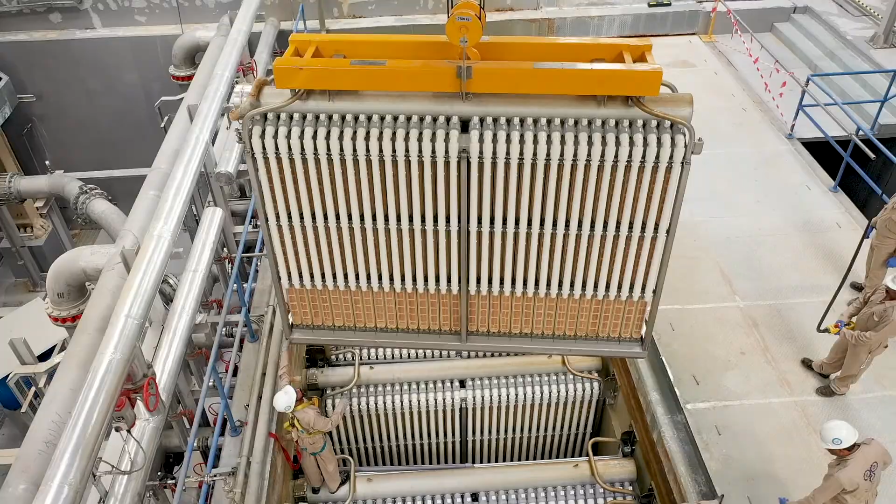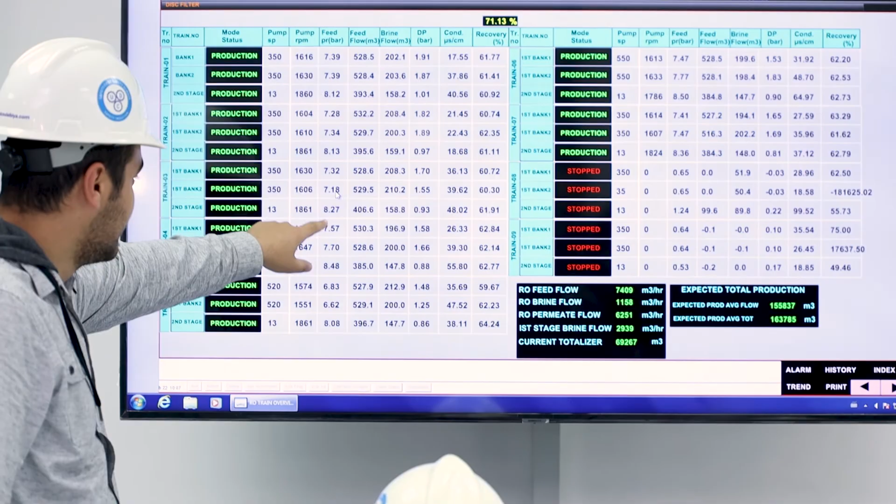A major concern for the Kuwaiti government is to protect health and environment. Hence, it is willing to endorse all strategic projects that are developed based on the latest state-of-the-art technologies, deliver top global results, and hand it over to the most reliable expertise to execute and operate. Therefore, at Utilities Development Company, with our wastewater treatment and reclamation plant at Sulaybiya, we are setting the standard for water reclamation and reuse regionally and globally.

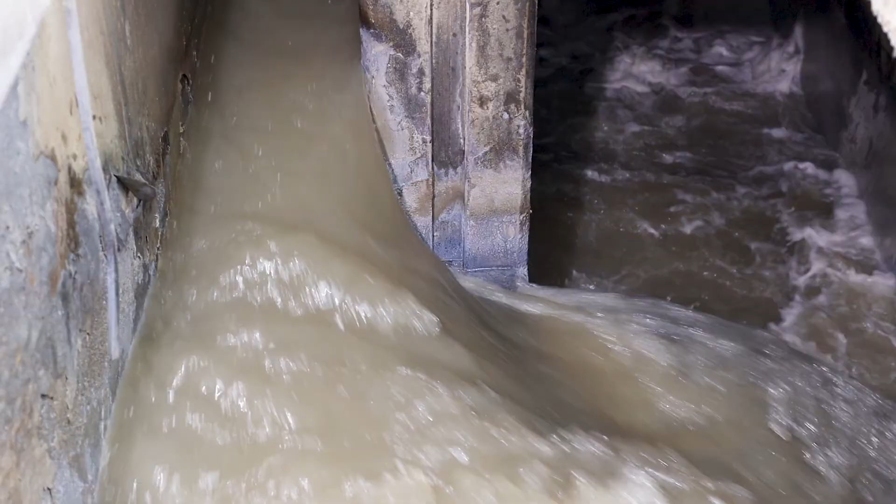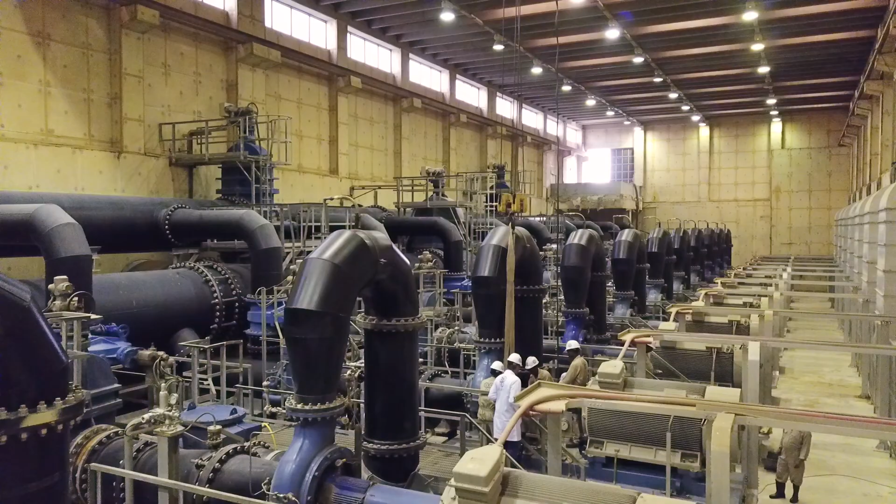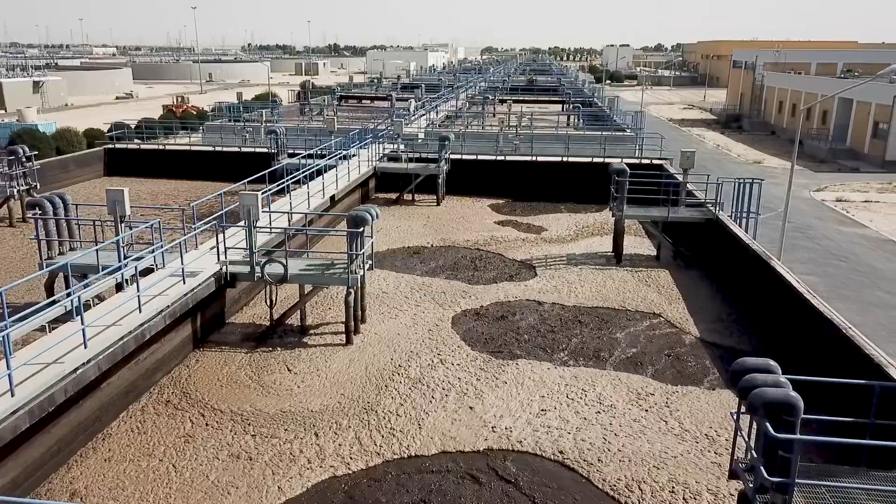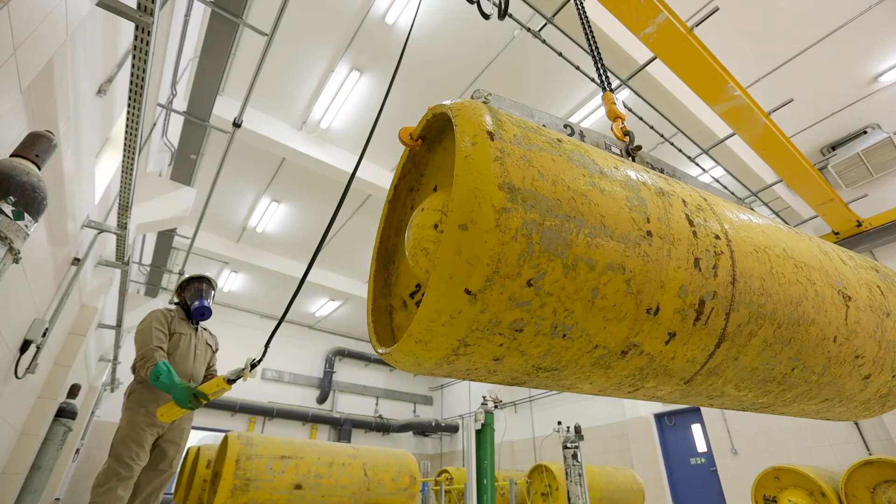The concept of the project is to treat domestic wastewater generated in the state of Kuwait to potable drinking water quality for ultimate reuse. Utilities Development Company, UDC, was awarded the concession contract for a period of 30 years to build, operate, and transfer (BOT) the Sulaybiya Wastewater Treatment and Reclamation Plant. In December 2004, the plant successfully commenced its operation and maintenance phase. UDC, the concessionaire, continuously oversees the plant's daily running complexities and coordinates the various operational aspects of the plant.

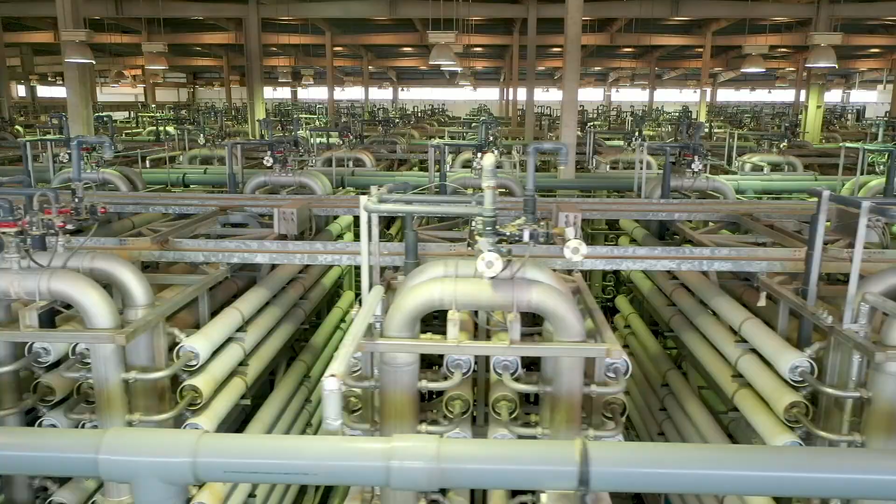Since December 2004, the plant has been treating and reclaiming 375,000 cubic meters of raw sewage per day to potable standards exceeding the World Health Organization's requirements. The product water is discharged to the Ministry of Public Works for end use. In April 2019, the plant was expanded to treat an inflow of 600,000 cubic meters per day, which represents about 60% of Kuwait's domestic sewage.

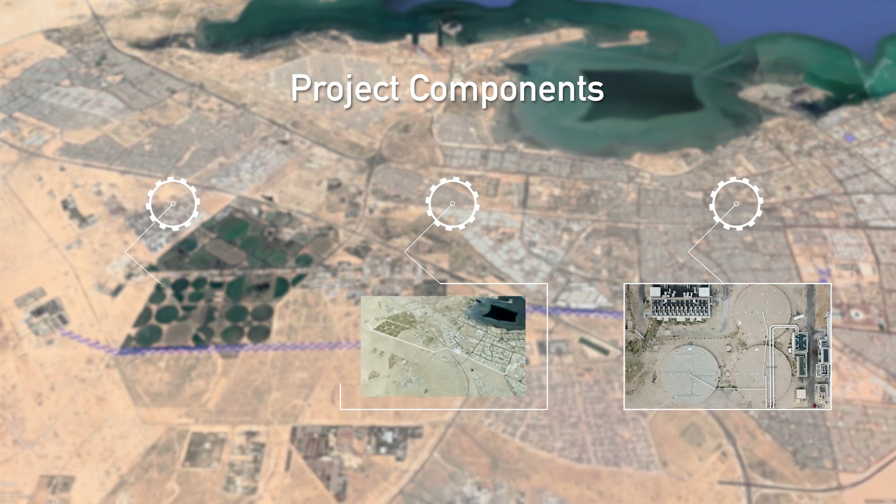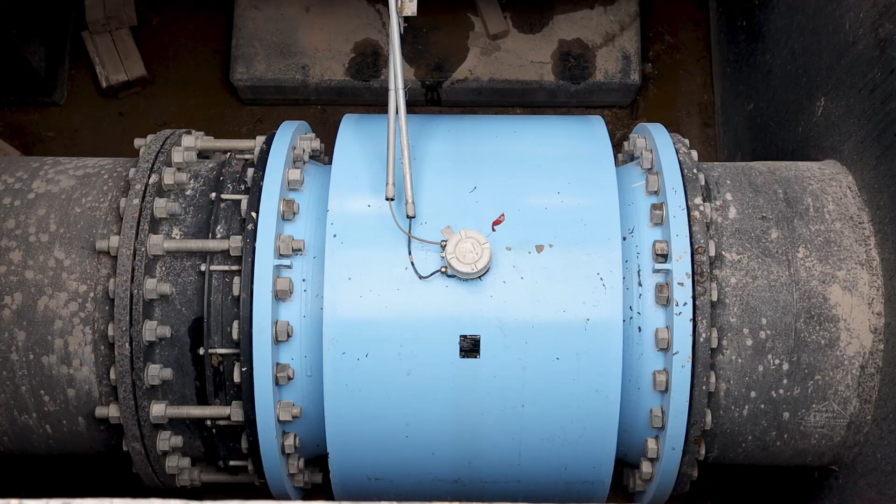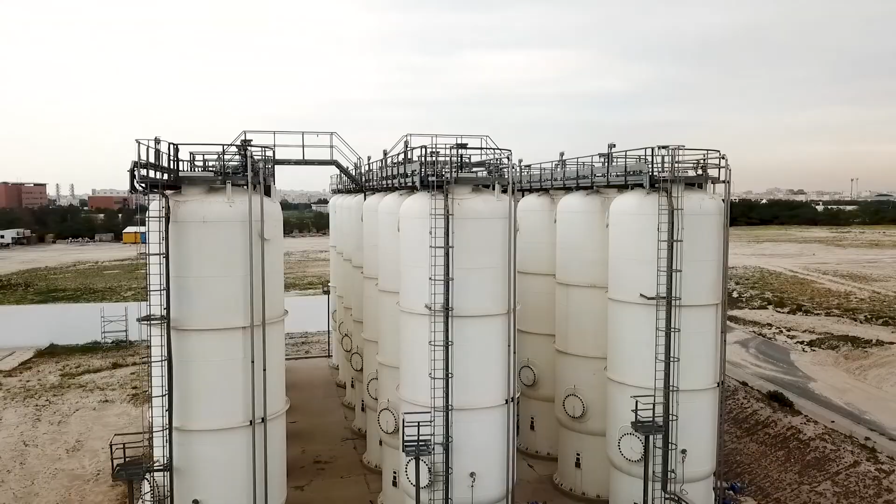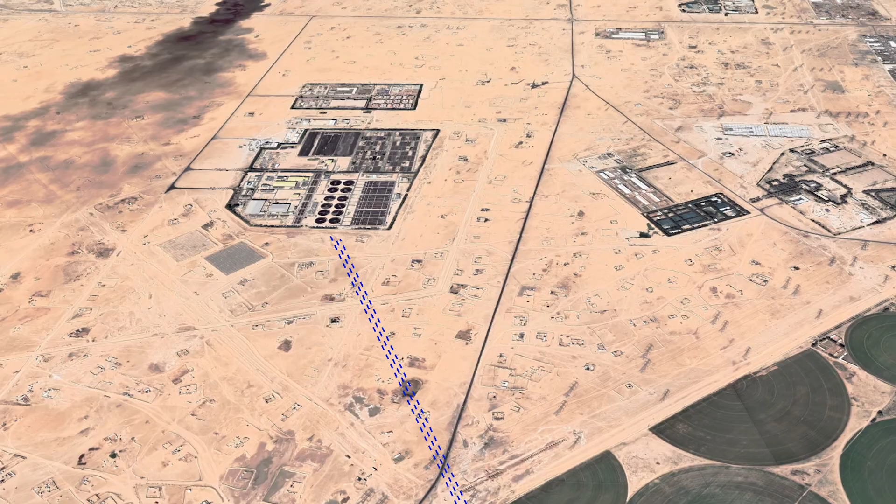Project components. The project consists of 3 parts: Ardiya plant, transfer pipelines from Ardiya to Sulaybiya, and Sulaybiya plant. Ardiya plant is a pretreatment plant handling the domestic wastewater flowing from MPW main pumping stations, Mishref and Rigai. It's comprised of flow measurement, screening, degritting, oil and grease removal, odor control facilities, flow buffering tanks, main feed pumps, and surge vessels for pumping pre-treated wastewater to Sulaybiya plant. Transfer pipelines. 3 pipelines, each 1,400 millimeter diameter, ductile iron, 25 kilometers long, convey the pre-treated wastewater to Sulaybiya treatment plant, equipped with pressure sensors to monitor operating pressures in each line.

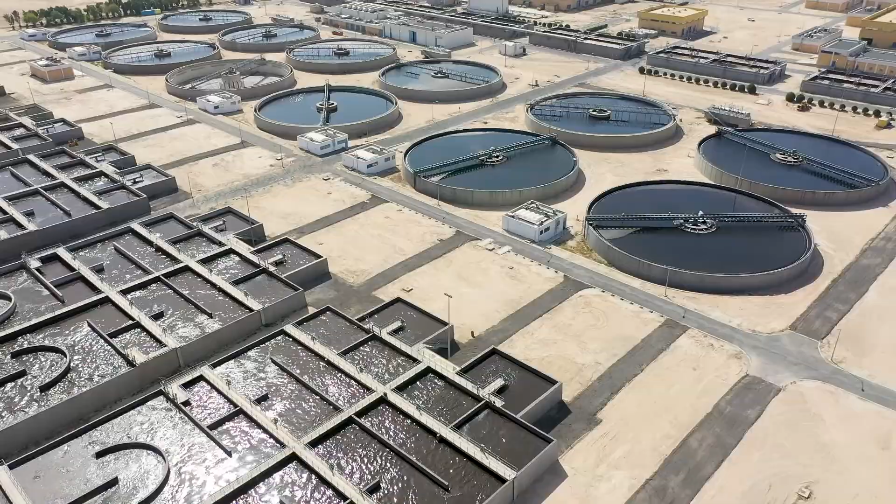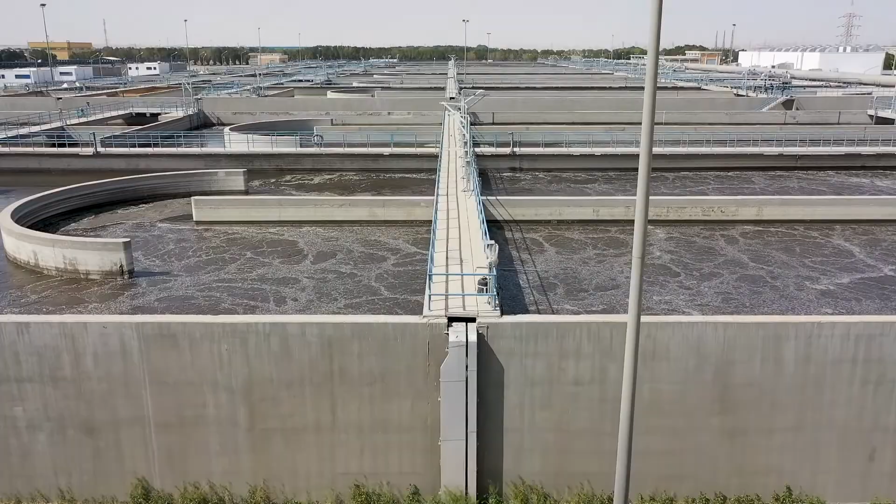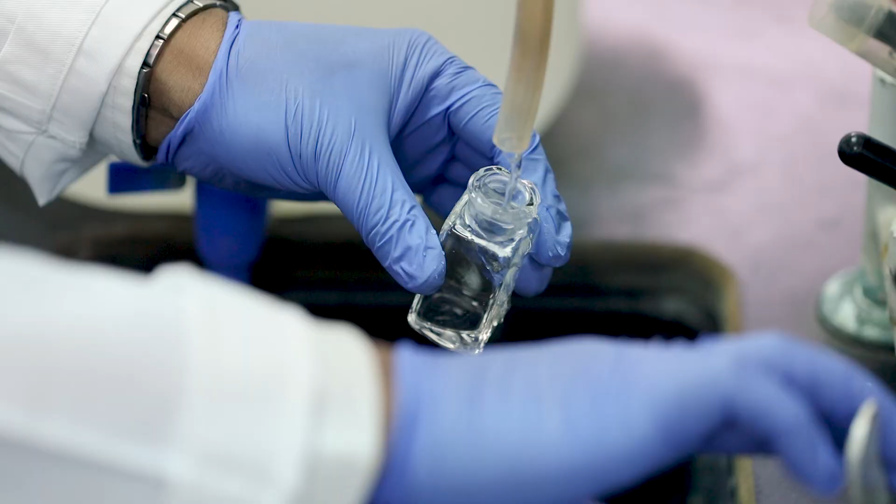Sulaybiya plant. To achieve the final product water quality, the plant is divided into 2 separate process plants. 1. Biological nutrient removal process by means of activated sludge. The biological nutrient removal plant depends on maintaining a critical biomass of activated sludge in aeration tanks to reduce the nitrogen and phosphorus content of the wastewater. This plant consists of 12 process trains, each having 55,000 cubic meters of volume capacity, which produce secondary treated water. 2. The secondary treated water is reclaimed at the reclamation plant through a complex system of disc filters, ultrafiltration, and reverse osmosis membranes to produce a high quality of treated water as specified in the concession contract. This plant is the largest plant in the world for producing reclaimed water from wastewater.

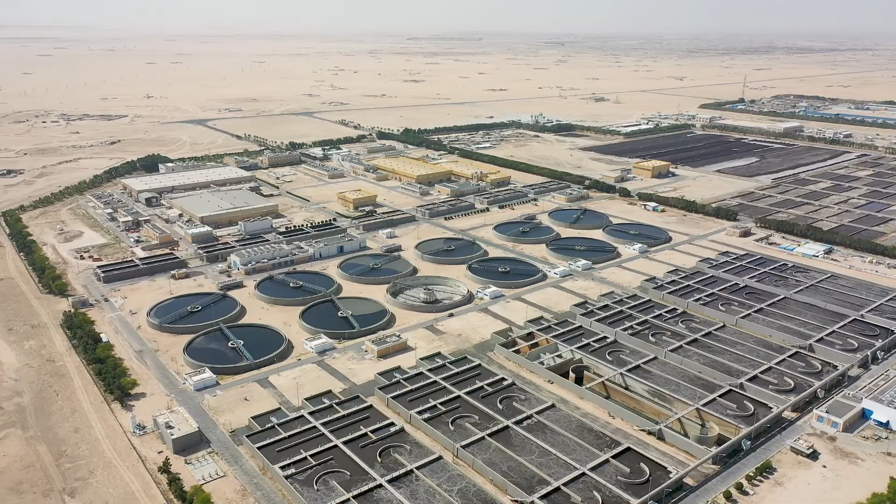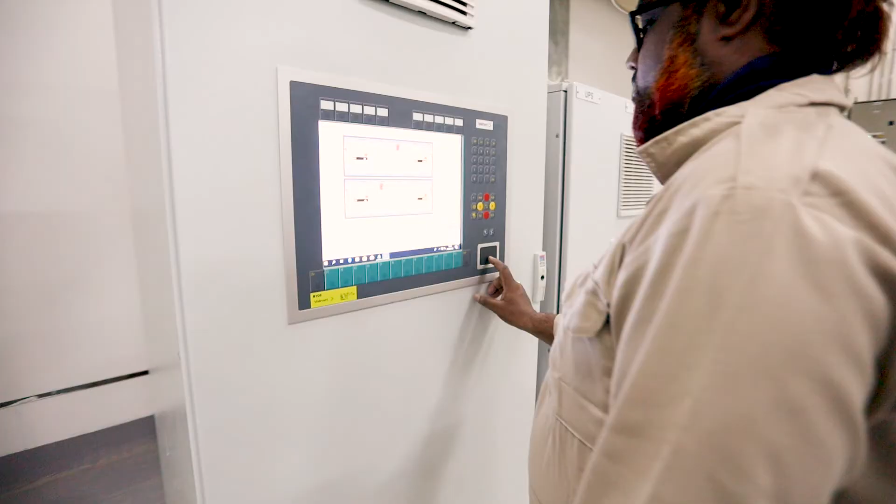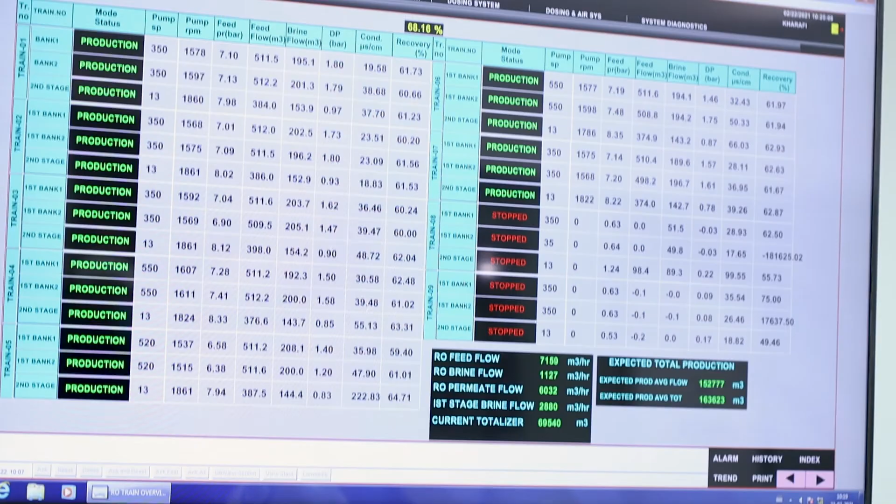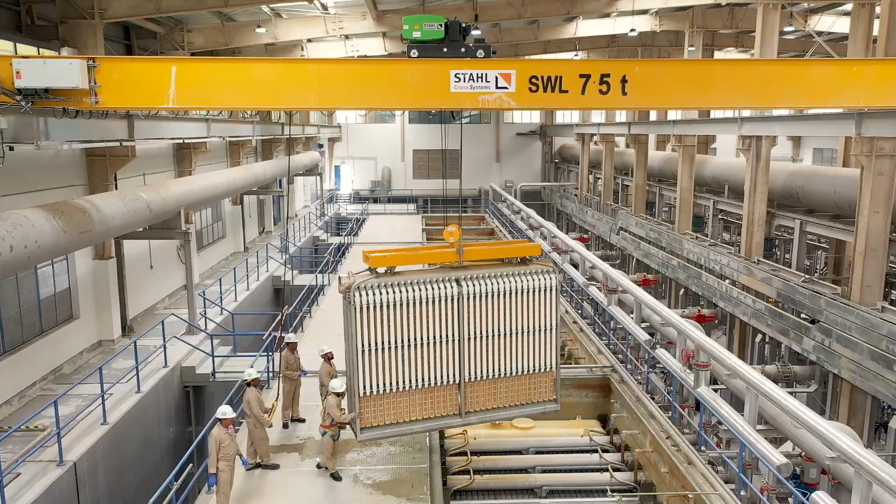Facility maintenance. As the total project, inclusive of Ardiya and the transfer pipelines, is configured to essentially operate automatically, the numbers and types of mechanical, electrical, instrumentation, control and acquisition systems are without doubt enormous and vastly complex. Of particular significance and importance is the critical supervisory control and data acquisition (SCADA) network that receives and logs all system operating data and compares the data to preset parameters. If operating conditions are not in accordance with parameters, a system alarm is initiated requiring manual intervention to address the issue. However, to keep all equipment and state-of-the-art control systems active 24 hours a day, 365 days a year, requires effective routine and preventative maintenance programs to ensure that plant operating parameters are not compromised.

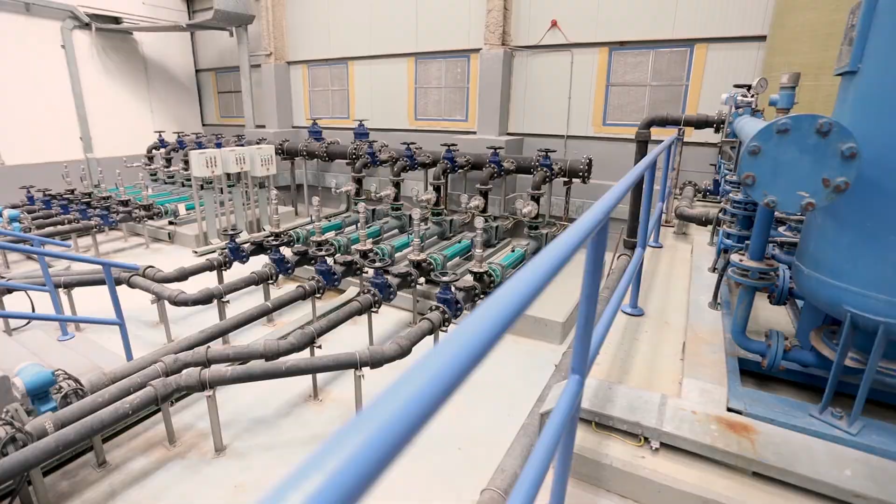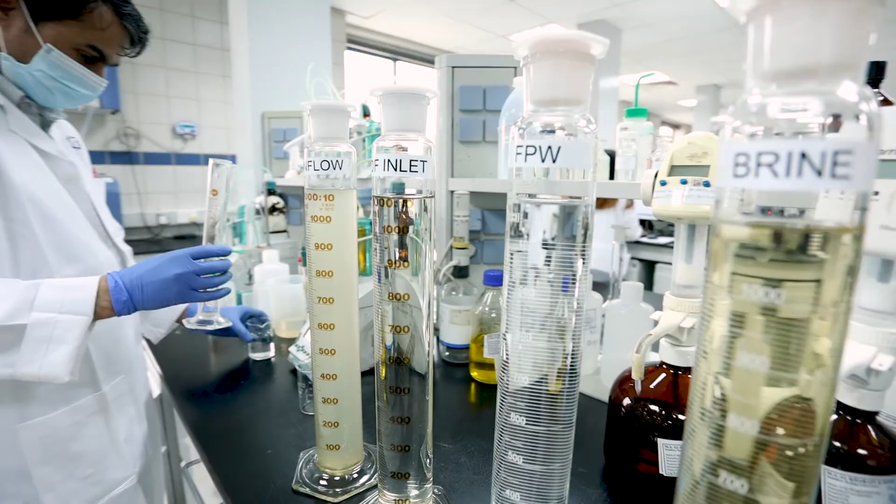As the concession period progresses, UDC continues to strive to ensure the various processes comprising the project are the best they could be, whilst continuously searching for the latest technologies for potential enhancement of those processes. The project maintains its environmentally conscious outlook by minimizing odors at Ardiya and by minimizing marine pollution, as no untreated wastewater is discharged to the sea. Reclaimed water is also used in a safe manner to the benefit of the environment for Kuwait's landscaping, Abdali, Sulaybiya, Wafra farms and Kuwait University new facilities at Shadadiya.

In accordance with the terms of the Build, Operate, Transfer (BOT) contract, when the concession period expires, the plant's ownership shall be transferred to the state of Kuwait, free of charge. Over the concession period, the project will save the state of Kuwait a total amount of 5.12 billion dinar by using a more economically produced water source.